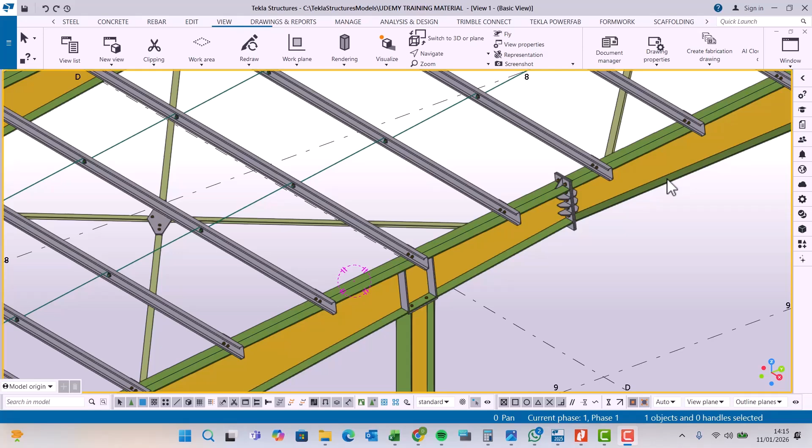Back to part 3 of gable column base plates and end plate connection. I'll switch back to isometric view and rotate this. Here we have the stiffener in place, but we don't have it on the other side. What do we do?

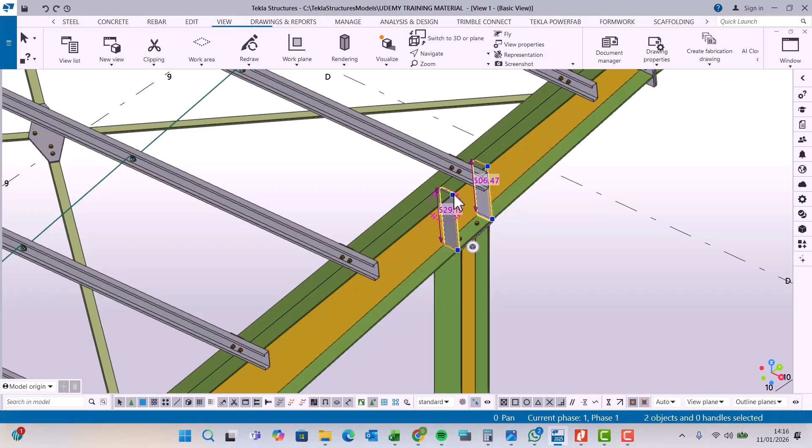I'll select here, select the stiffener, right click and come to copy special, and pick mirror. Our mirror line will be this.

I'm seeing some very strange members there. I don't know how they came there, but we don't need this. Don't ask the question there because it's not necessary.

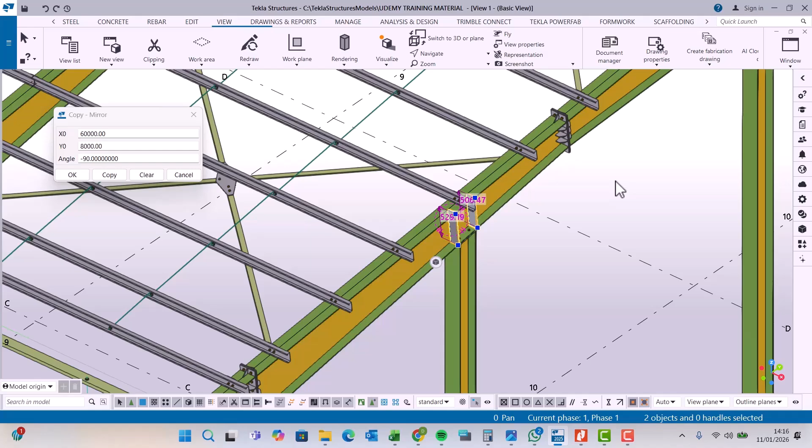I've selected this, so I want to mirror it. This is my mirror line, click copy. If I go to the other side of things, I find my stiffener in place. Perfect.

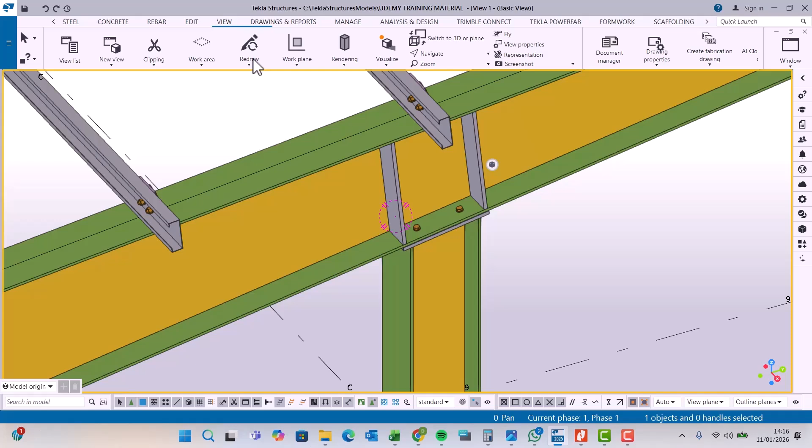Remember to weld. I'll come to steel and come to weld. Just click on that, and I want to weld this to that, weld that to that, weld this to this, weld this to that, weld this to this.

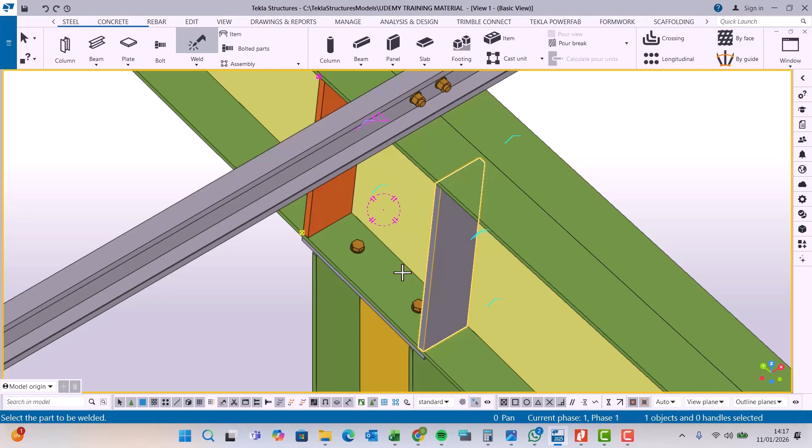Perfect, and we can turn the same way the other side, come to steel and come to weld, weld this to that, weld this to that, weld this to this, weld this to that. I'll come to view, click navigate and rotate, and we have that in place.

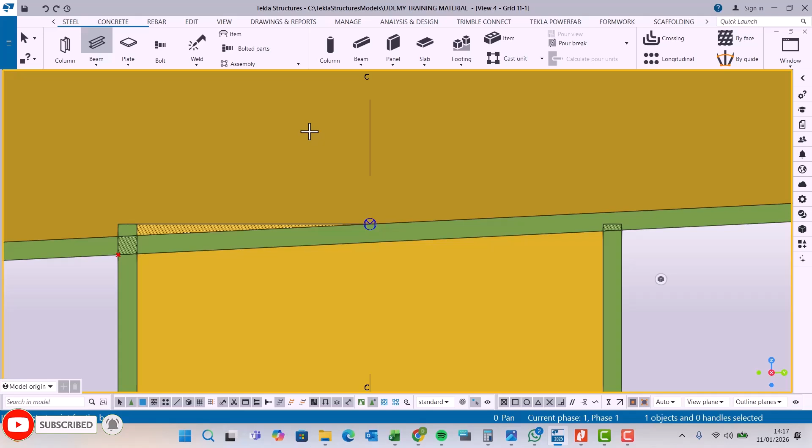So now let's switch back to elevation, and we want to do the same thing here we did on the other side. I'm going to come to edit, and I want to create an end plate right there.

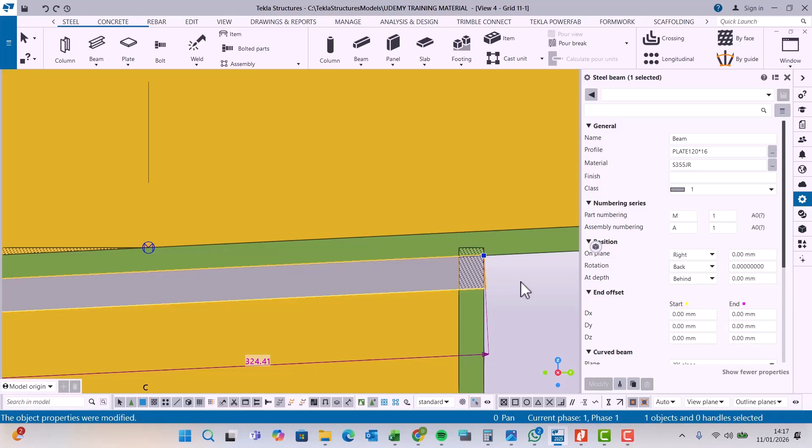So we have an end plate right there. Double click on this, and I want to change that to 0 because you don't need any extension. I want to take it front, take it behind, and see how it behaves. Right there, I'll select on the plate, click on that, and I want 400 as we had done before, and just click type enter.

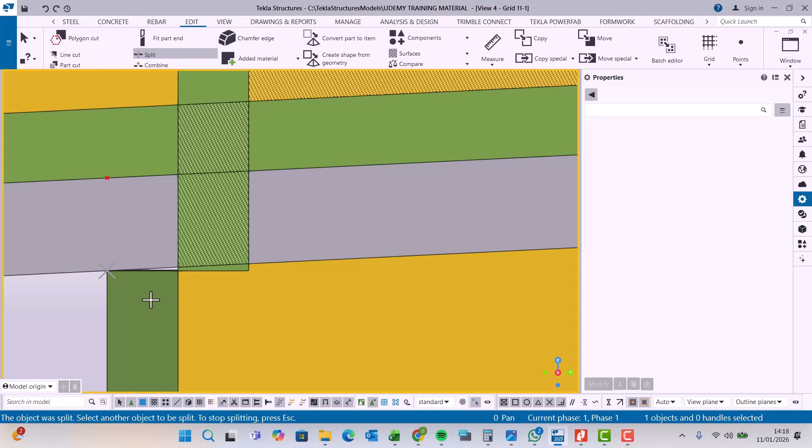I'll come to edit right here and pick on split, and I'll pick the parts I want to trim off. Select on this, and I want to trim off that. Select on this, and I want to trim it from that spot. Select on this, and I want to trim it from that spot. And it's advisable to delete the unwanted, and I don't need that.

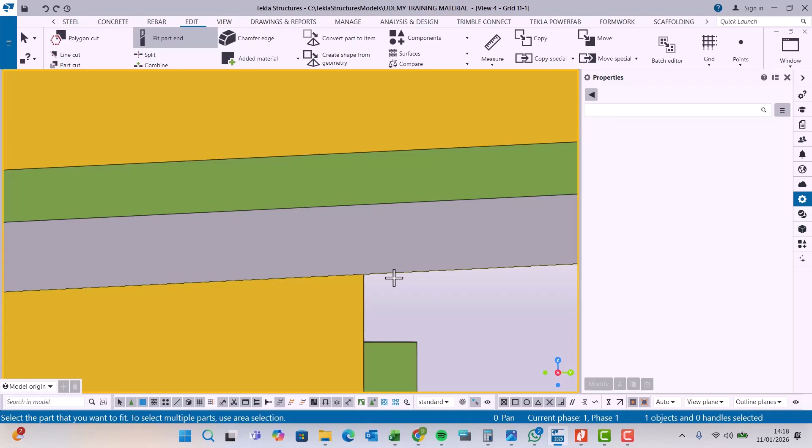Now we want to weld this to the end plate, so we'll use this fit tool. I want to fit this from here to here. So the web has been fitted. Come to fit end again, select on this, and I want to fit it from that spot to that spot, and that has been fitted.

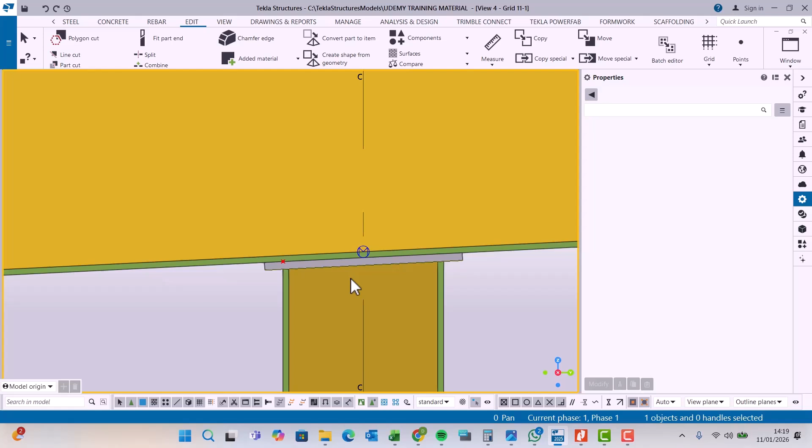And we're missing this. How do you fit this? Select from that, and I want to fit it from there to that spot. This is interesting, isn't it?

Now let me just drag that and come to edit, and I want to use some points to guide me. I want to snap on that spot and snap on that spot. I'll snap on this spot and snap on that spot.

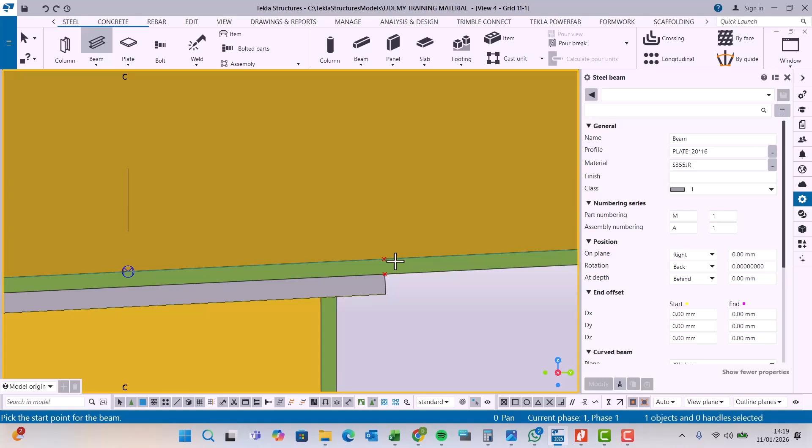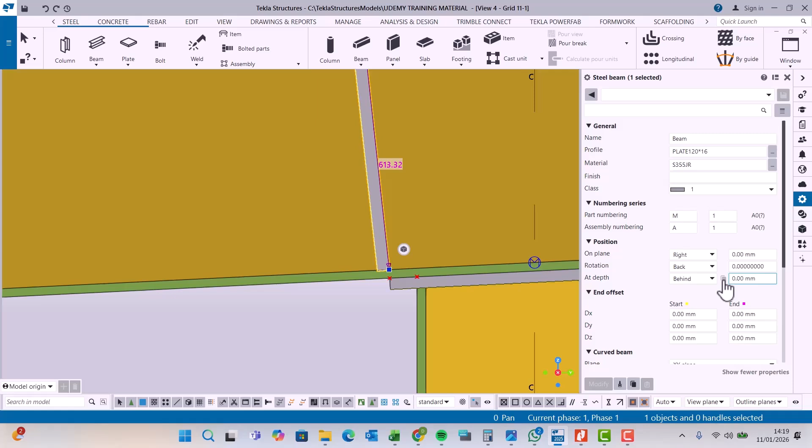Now I want to place my stiffeners. I'll come to beam, and I want to snap on that spot. Right click and come to perpendicular. Let me snap on that spot and come here, right click and come to parallel, perpendicular, not parallel, perpendicular, and front. Perfect. Remember the size of that is 120.

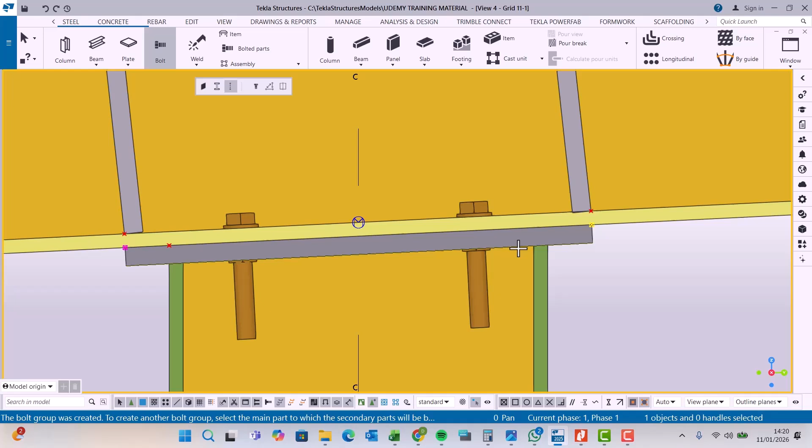Now let's place the bolts. Are we together? Now I'm going to create a bolt connection between these. Press my middle button on the mouse, and I want to stretch all the way to that spot. So are we together? We are together, but of course you can see this long bolt length is an indication that there is a small error.

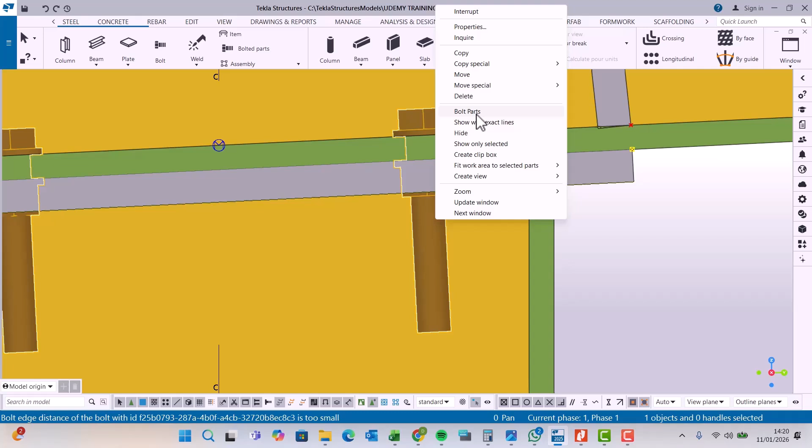So I select on it, right click and come to bolts, and pick the parts to bolt together. Select that, right click, pick bolts, pick this, and I'll pick that. Press the middle button on the mouse. It is not responding, so let me just delete the bolts once again.

I'll come to bolts, select this and select on that, press my middle button on the mouse, snap on that spot, and snap on this spot here. And I can see I still have the error.

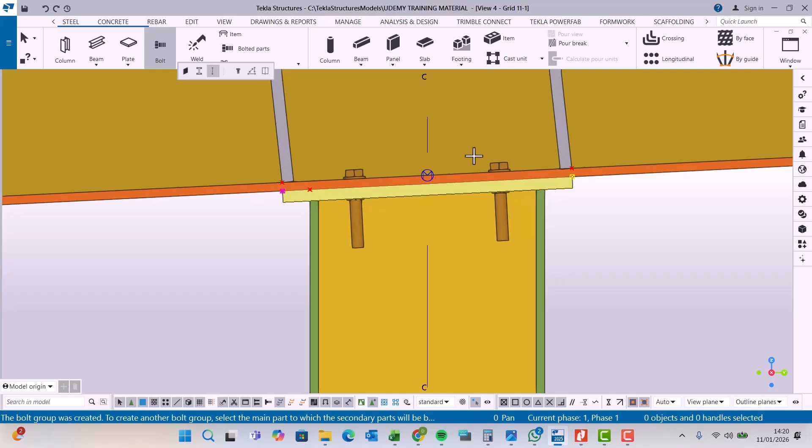Right click and come to bolted parts, this and that. Press my middle button on the mouse. Don't worry about that, there's so many things to worry about.

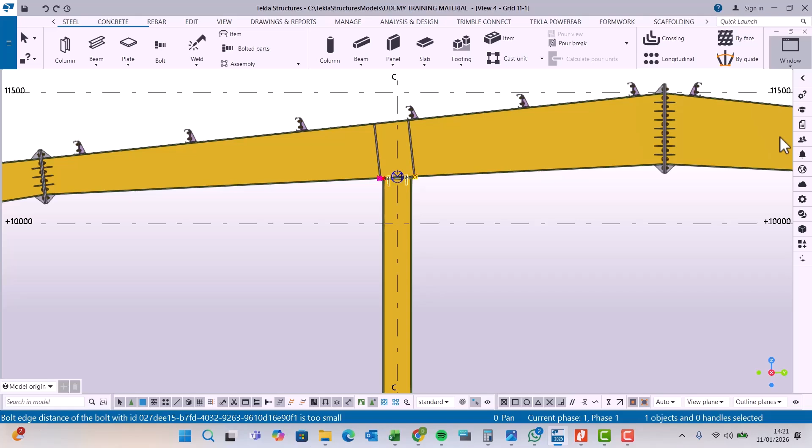I'll come to isometric view. Under isometric view, just double click on that and cut the bolt length maybe to 0, maybe 100, bolt spans, this one and this one.

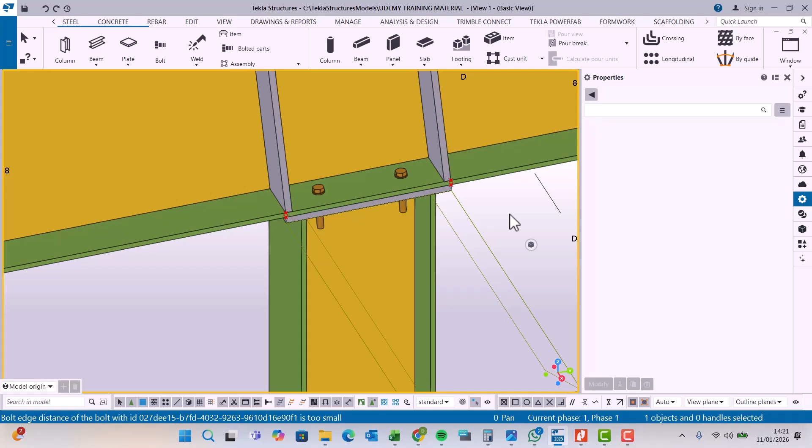Perfect, right click and redraw. We can leave it as it is. There's nothing wrong with that.

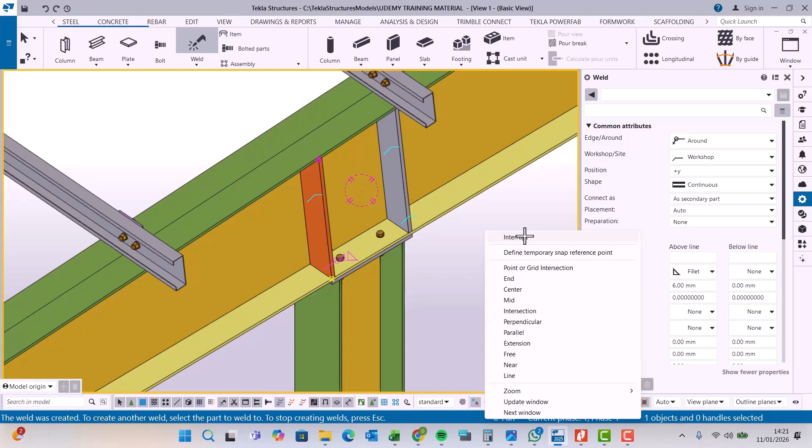I'll come back, navigate, rotate, and I want to copy this stiffener to the other end. So I have to weld them first - weld this to that, weld this to this bottom flange. Let me select this stiffener, right click and come to copy special.

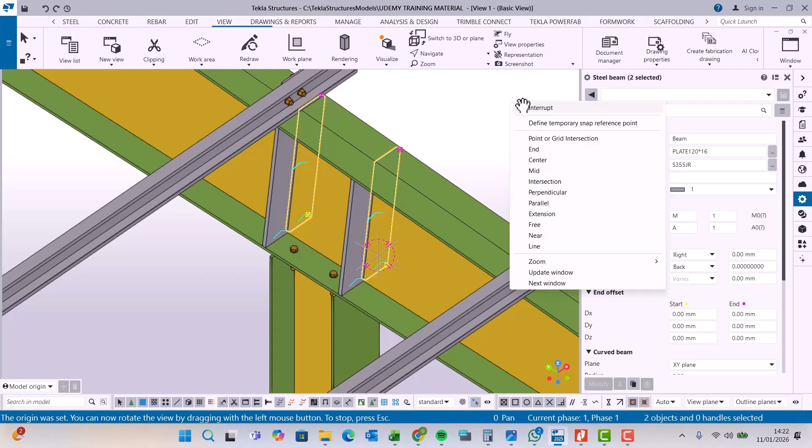I want to mirror this by defining a mirror line at the bottom end here. I click copy. Once I've copied this, I come to view, navigate, rotate with mouse, and I have this in place. You can see that perfectly done.

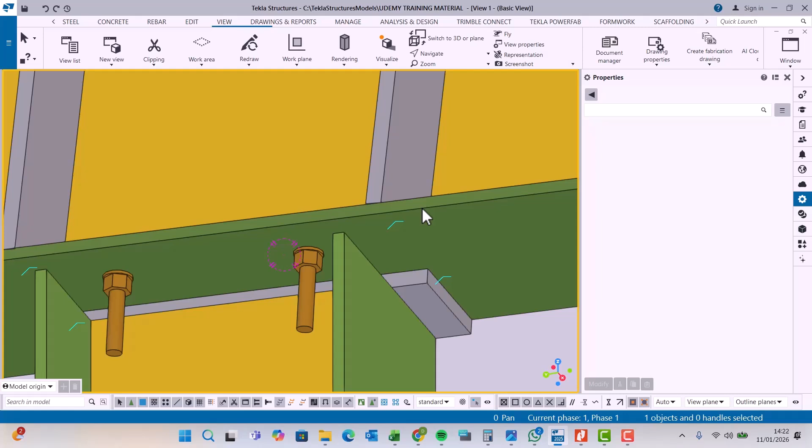So you see the reason our plate and bolts were not working out is because the plate was not of the appropriate dimension. The web width was 250, so double click on it and change this to 250.

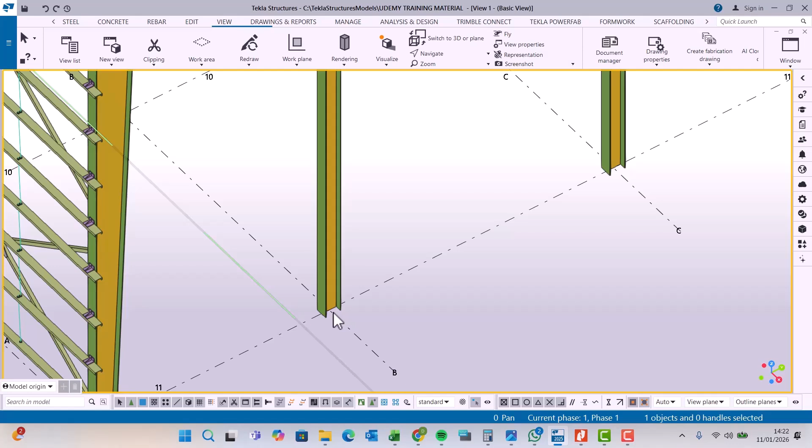Yes, we are in class and hope everyone is attentive. You can see the bolts adjusting and no error. The moment you click bolting and see the bolts slightly longer than really necessary, that's an indication of an error, not a rule.

Now I'll come to base plate and pick on the base plate here. Just key in the base plate, because you need to place the base plate here. I'll pick on that and want to make this active, select on that and snap on the bottom end there.

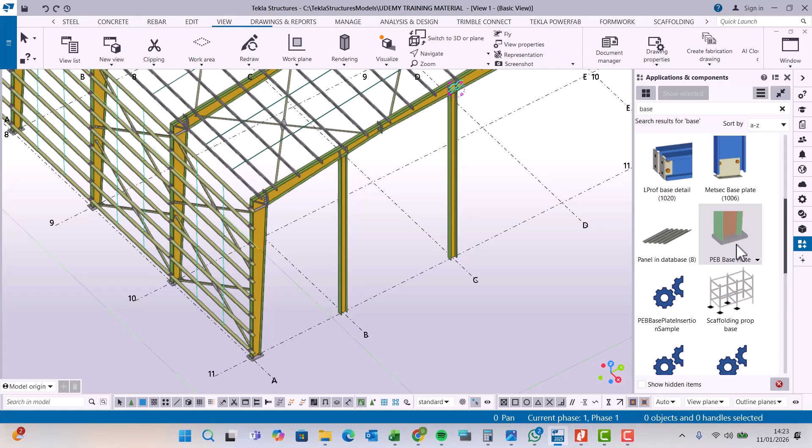Not responding. It is not responding. Okay, no worry. Undo - make this active and switch back to where we were, select on this. Not working. So let's switch back.

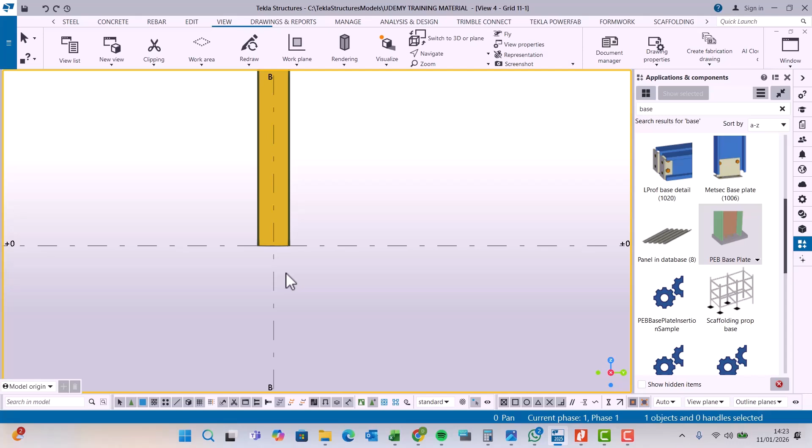To elevation and try to create that. Let me come back to PEB right there, and we have a base plate.

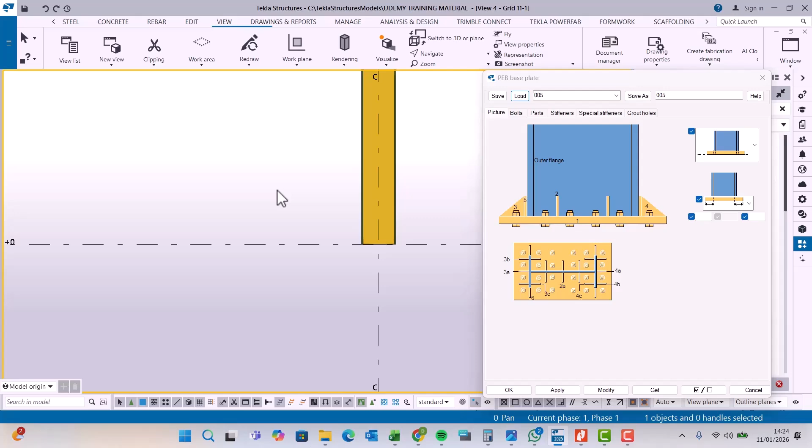Select on this, select on that, and press the middle button on the mouse. Let me just double click on that and come back here, select on that and load. Once I've selected on that, I'm going to come here and press.

So it's not picking up that because of the orientation, but not really the orientation - sometimes it fails to respond, but that should not stop us from moving forward. I'll come to isometric view right there.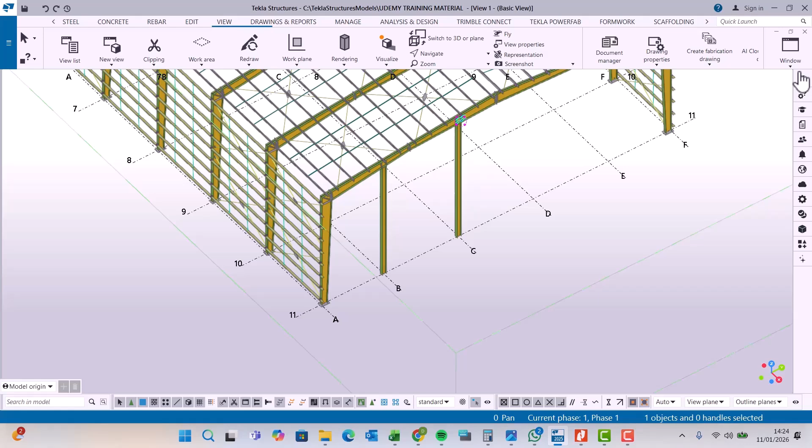What I'm going to do next is copy this, leave alone whatever has refused to come alongside us. Let me select that and deselect. Let me select this - let me select what I can select, like that, and deselect what we don't need.

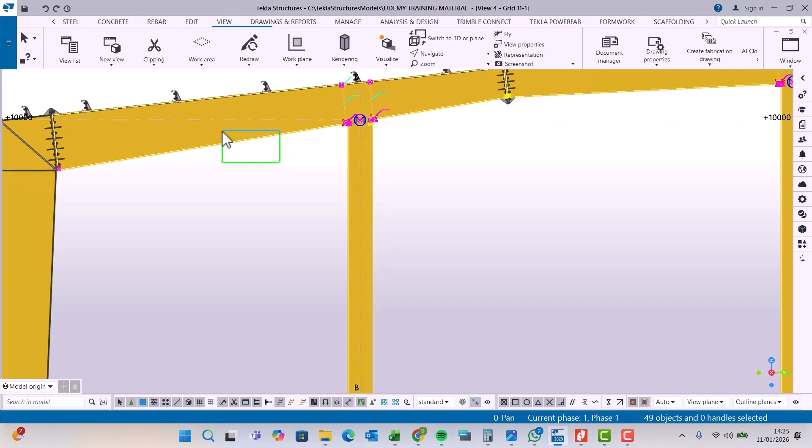Once I've done the selection, I'll switch back to isometric view. Right click and come to special copy, pick mirror. The mirror point is this, mirror line is that, and if I click copy, I'll be able to have those columns on the other side.

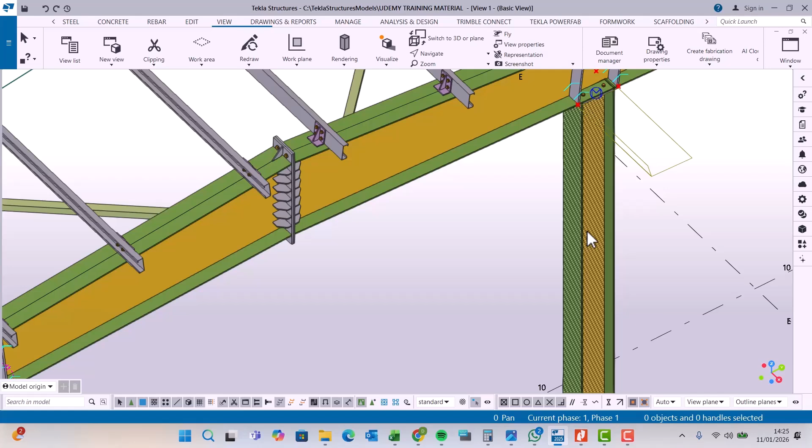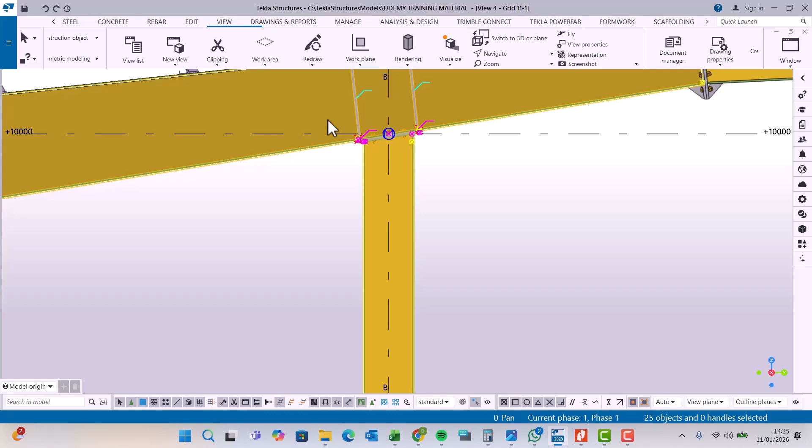But there's some double copying which can bring some sort of confusion. One thing you need to note when doing a selection - this button has to be active when doing selection, and press Control and deselect parts you don't want, then deactivate this when you're doing the mirroring.

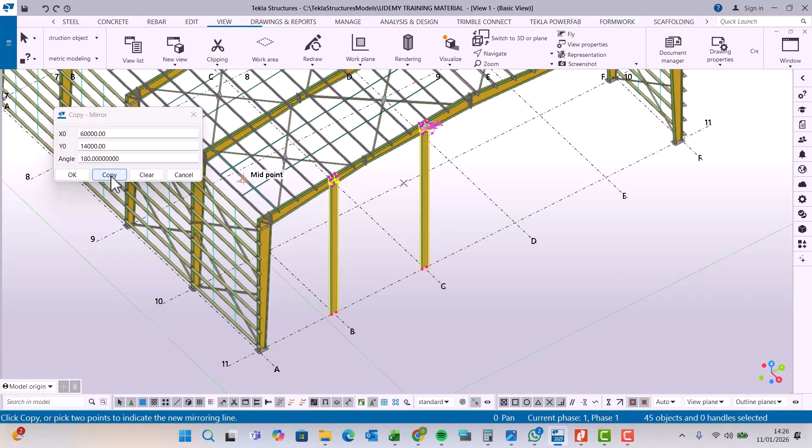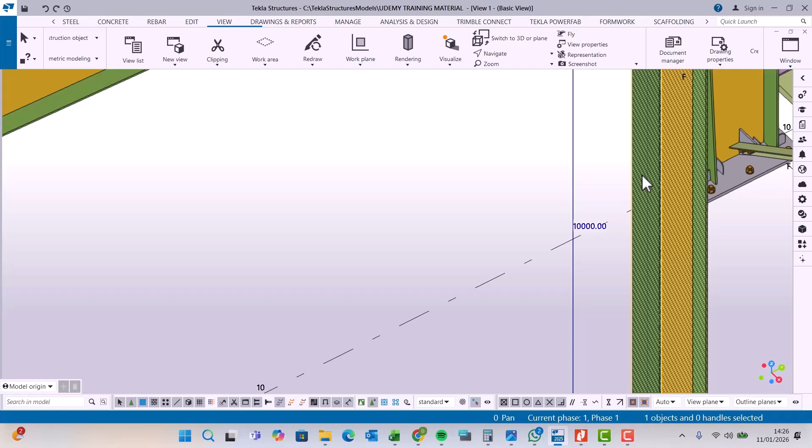Let's switch back to isometric view, right click, come to mirror and define the mirror line. Let me click on that, and it seems we've copied more than one. So let me pick the parts we don't want and remove them one by one.

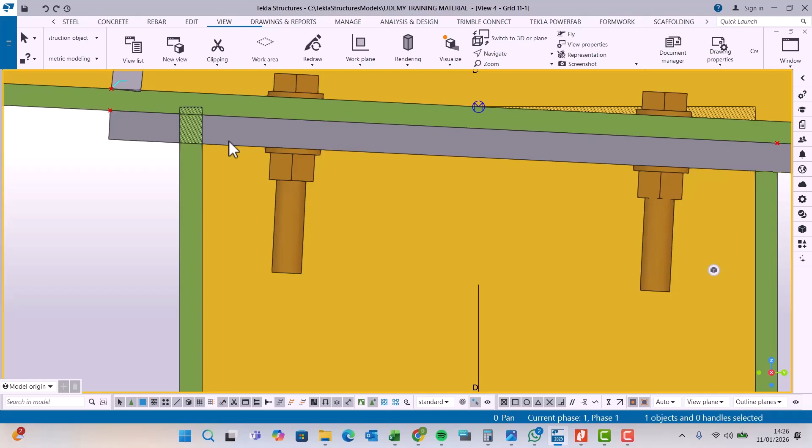If I switch back to elevation view and zoom closer, you can see we're missing some points. This one is okay, and this one is not just okay - it's messy, not Messi the footballer.

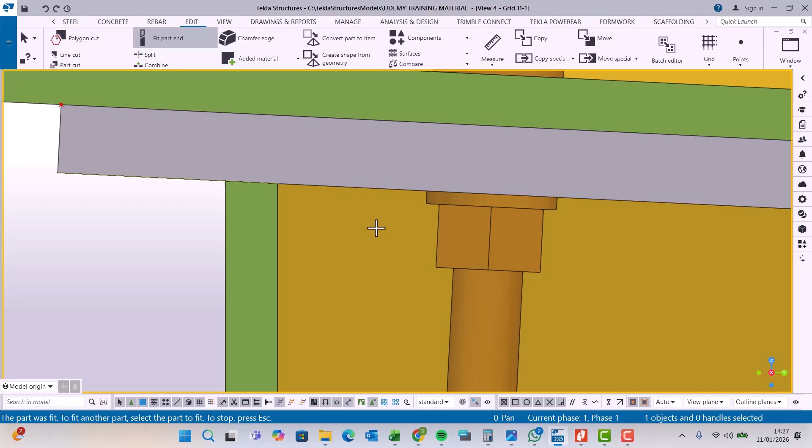Now let me just come here and edit this. Select on this - no, not selecting on that. I need to fit this. Come here, select this and fit it alongside this.

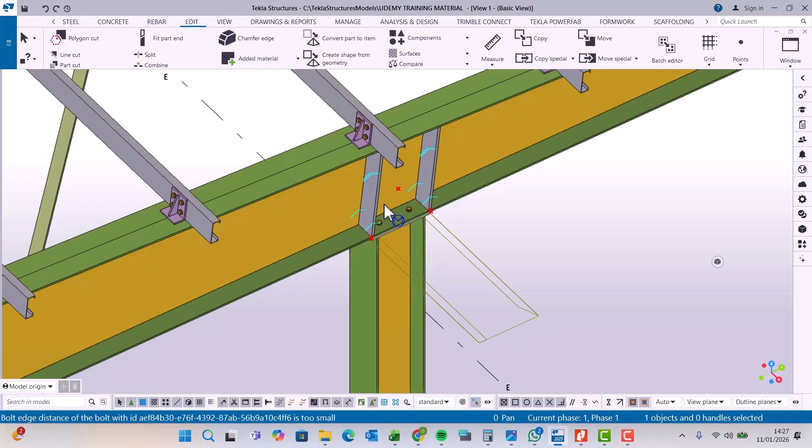Now if I select this, right click, come to bolts, and I want to bolt this to that, and press my middle button on the mouse, there's something wrong. Let me switch back to basics, come to view, navigate, and if I turn this around, you can see something is missing.

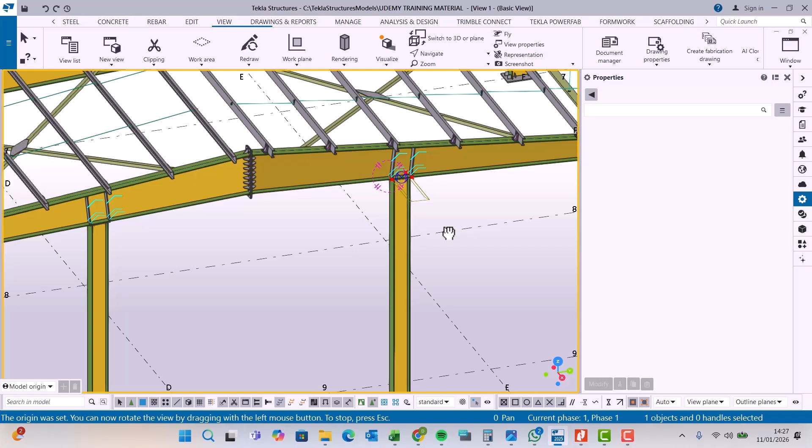If I double click this and change this to 250, that's it - we don't have that error anymore. So if I turn that around, I think this is what was being carried over to the other side. This was corrected, but it seems to be being carried the other side.